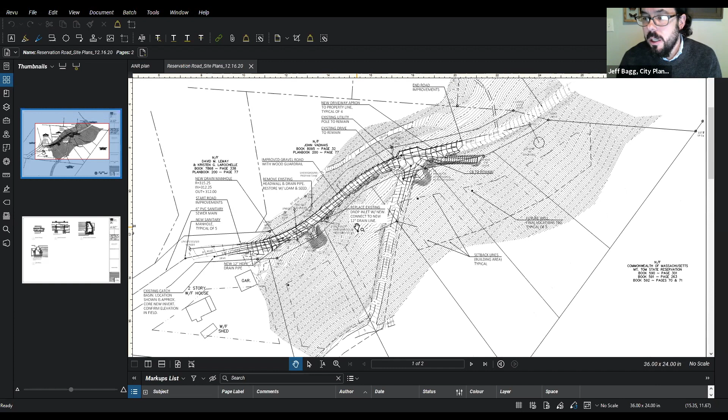I've had several discussions with Captain Constantine, and I think they requested one additional change in the HOA document, the Homeowners Association document, and my understanding from Attorney Lane is that change was made. To be honest, I was expecting either Captain Constantine to be on the call or to write a letter, and unfortunately we don't have either. But I'd provide in good faith that the fire department was accepting of this concept. It's taken a while to get to the HOA, so at some point having Attorney Lane just talk through that. In the meantime I'll email Captain Constantine and see if he can hop on, but I do know they were supportive of where the applicant has ended up. Jeff, even if you can email or text him to confirm he's okay with this subsequent change to the HOA document, I don't think we need to drag him into a Zoom call if we can just get some more verification of that.

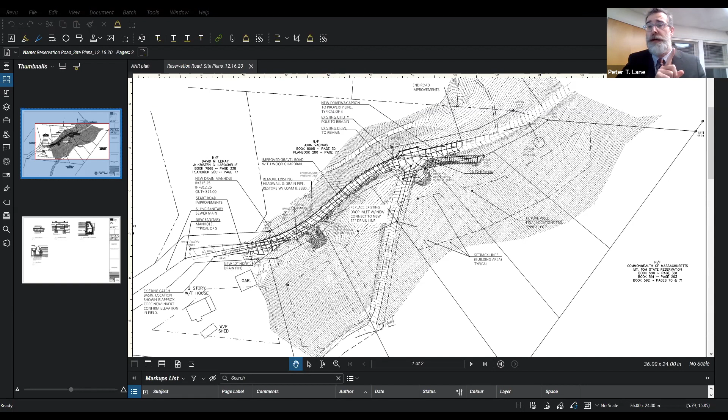Yeah, understood. Peter, does that sound like your understanding of where you left it with Captain Constantine as well? Everyone has the most recent HOA document that was forwarded very late this afternoon. Absolutely, that is exactly where we left it. He received my last draft Wednesday last week, emailed back that he had one minor change, which I put in and accepted. Then today I submitted further changes to the HOA that satisfy, I believe, what the Easthampton Fire Department is concerned with, and what the city engineer is concerned with as well, which I'll get to.

Okay, great. So before that, I cut you off - you were talking about getting water up to lot 5, I think, right? Yeah.

Give me one second, I'm going to do a quick change of hardware here because I'm going to want to put the HOA document up, and I don't know if you guys have all got it.

I have it. Chris has that too. I got it all. All right, great, thanks.

Two documents are submitted to address all of these concerns. One is the new site plans from Jeff Squire, made after the walkthrough with Captain Constantine. The other is an HOA document to spell out homeowners' responsibilities and acceptance of responsibility and liability for the road.

The fire department wanted to see a turnaround right there in the middle, which we now have designs for. DPW also wants other improvements to the road, including water drainage. Especially the fire department wanted to see that the road is left at a passable width of 16 feet at all times, meaning in winter, plowing will have to account for that, and snowbanks cannot encroach on that 16 feet of passable space.

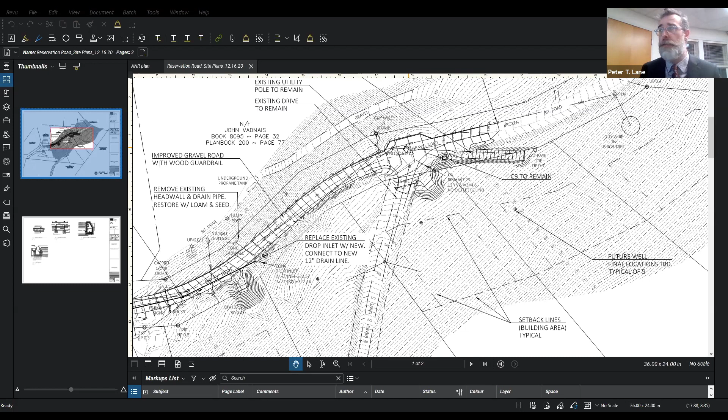They also wanted a requirement that all homes built on lots 2 through 5 are equipped with a 13D sprinkler system, which would just be a life safety measure to give the fire department a bit of a cushion, so that if there's an actual fire, the sprinkler system is hitting it before the fire department arrives. They wanted us to also explicitly point out that the 13D sprinkler system is only a mandatory life safety measure, and that homeowners still have to expect a delay in the arrival of emergency vehicles.

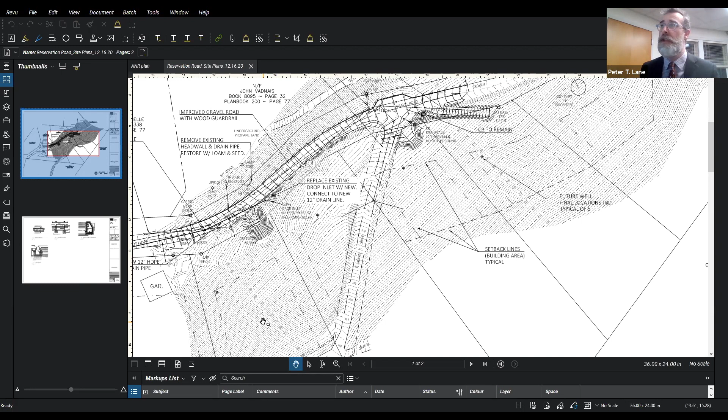We have done that. If Chris, yep, if you would be so kind as to put up the HOA document. Sure, can you see it now? Or do I have to reshare? Yeah, I think you got to reshare. Okay, give me 1 second, figure out how to do that. So I have stop share and then reshare. All right.

Okay, can you see it now? Yes, great. Yes, success.

So what we've done with the HOA document is, Article 2 restrictions is really the relevant piece for all of this. It's where we addressed all of the city's concerns. So as you can see in paragraph 1 of Article 2, maintenance of the roadway is completely the responsibility of the homeowners. And it's only the homeowners of lots 2, 3, 4, and 5, because as I've said, lot 1 is specifically excluded from this process right now.

The roadway maintenance requirements requested by the city will be handled by the homeowners, each paying a quarter of the costs of it all.

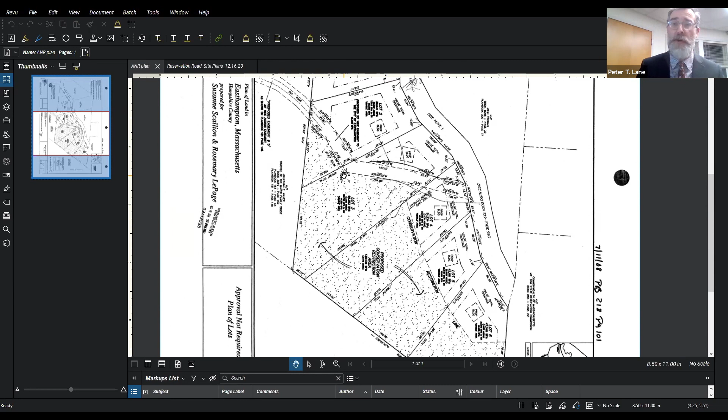The Homeowners Association document now makes clear that the conservation restriction remains, and homeowners cannot build on those areas -- again, those that are there on those site plans, the plans that were submitted with the ANR. But we make that clear additionally in paragraph 4 of Article 2 of the HOA document, that there is this conservation restriction.

If I am not missing anything, I think that covers the kind of history and the concerns that have been raised, and that we've used the homeowners association document to address.

Chris, would you mind -- oh no, we're all set. Conservation restriction, yep. So again, it was that section right there on the restrictions where we tried to address all of this with a single HOA document.

I'm not sure whose idea it was to use an HOA document in this way -- I think it might have been Jeff Bagg, and again I appreciated that input as well. It's really flexible; I found it to end up just being a totally flexible thing. I would draft it, send it to Jeff Bagg, he'd tell me what the concerns were, and I would go back to the drawing board with it.

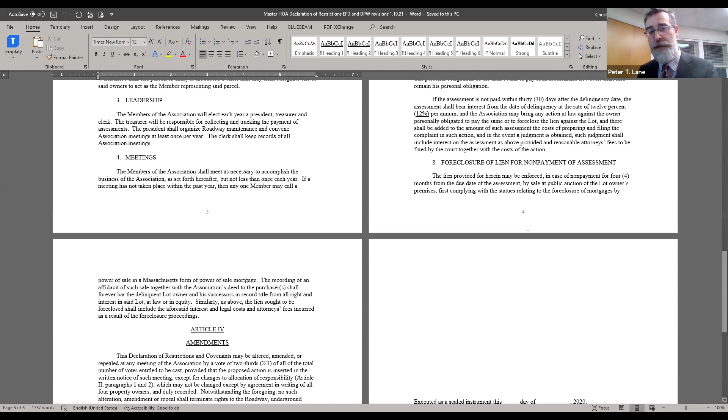With that too, I'd also like to say I'm happy to answer any questions. I'm sure Jeff Squire would as well. Also, I know this is a lot to digest, and we're all kind of doing this without a roadmap. Happy to present this tonight and come back next time for further questions if anybody felt like they wanted more time to digest this. I'm really kind of open, but I think that's the information I needed to present. From here, happy to just field any questions that anybody has.

Yeah, thanks Peter, that's really helpful. So I will open this up to questions to the planning board, but my first question -- it's always a little funny to have to ask the applicant's attorney this -- but the way I envision this is sort of, we would take a vote to accept the proposed roadway onto the property and sort of the continued maintenance of the homeowners association agreement going forward. Does that make sense? That's how we would condition it, just so tomorrow you can't adopt a different HOA agreement?

I think that does make sense. And again, my understanding of what I need out of this for my clients is some determination from you all that this works, which then we would have to file, because my prospective buyers would never get approved title insurance unless they saw that the city was approving of our plans wherever they're recorded.

So right, well, and they can't get a building permit, right, until we give that approval anyways. Okay, all right, I just wanted to think through the process of what we're actually working towards here.

Any other planning board members have questions or comments about this? Chris? I have a question.

So in the plan view, it looks like there's going to be city sewer and city drain, stormwater collection in the street. Is that correct? Connecting to the city's system? So there is city sewer that we're connecting up with.

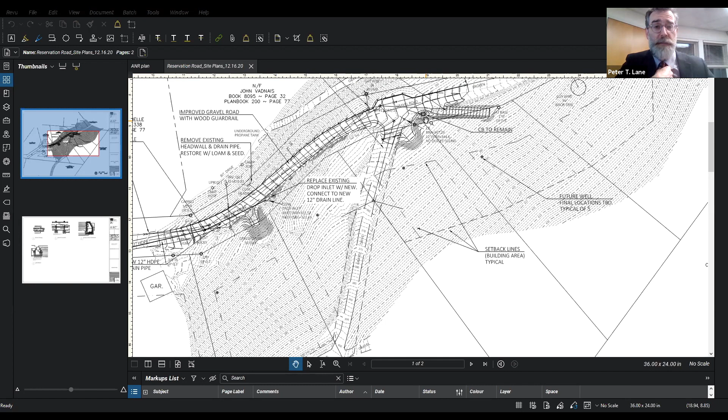Yeah, I could hazard the guess, which is that the assumption of DPW is that area we're talking about, that stretch, would fall under the responsibility of the homeowners. Yeah, and that's my understanding as well, which is why we drafted it the way we did and why I included the line of full responsibility for the road maintenance.

Gotcha. So the city picks up their responsibility somewhere down at this manhole, or maybe somewhere between these sewer manholes. Well, this is a new manhole here, so I guess this is where the city would, or the homeowners would, start. I guess we need to clarify exactly where their responsibility begins. Sure.

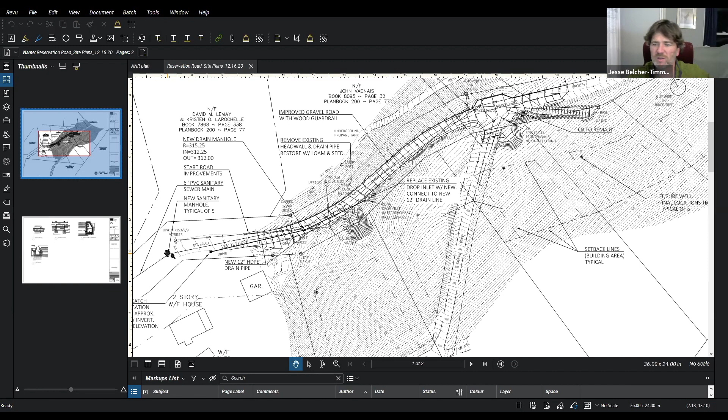Yeah, that might be a conversation to have with DPW. Does that sound right, Peter? It does sound correct, and I would like to have it and be clear on it. Yeah, especially the drain system, the stormwater system here. Looks like you're putting new drain manholes and pipes in here too. So exactly where the responsibility splits is my only question.

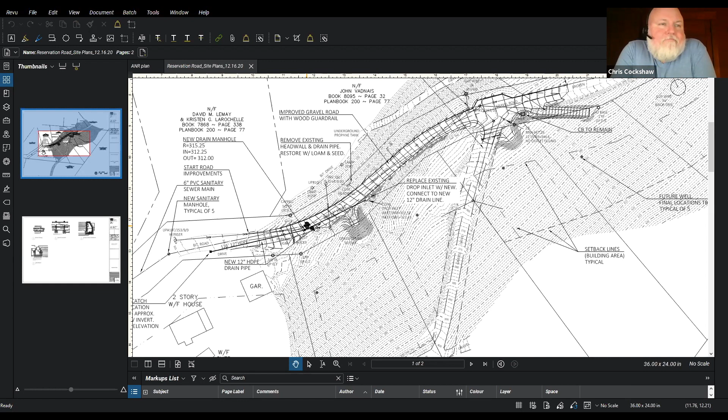Yeah, and it sounds, Peter, like your clients are assuming that they and then the subsequent homeowners will take on that responsibility. So it's probably not like a fight, just a matter of clarifying language so it's very clear to people ten years from now what's going on when there's a manhole. Yeah, I think that's a perfect characterization.

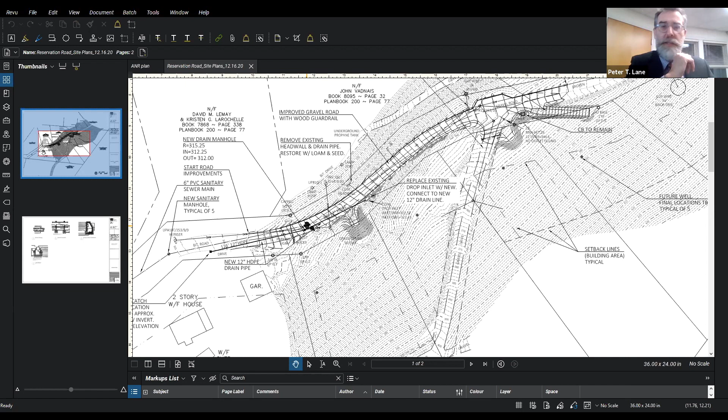My only concern when it was raised about making clear that there's homeowners' sole responsibility was how that would impact future homeowners' ability to get insurance or things like that. I'm very clear this is doable. It happens all the time in Western Massachusetts on private ways. It'd be a bigger problem in a rural area, but in a city like Easthampton, I don't think there's going to be any problem there. But yes, we should talk to the city engineer and get clarification on that.

Okay, great. Chris, any other questions? Nope. Harry, I think you had your hand. Yeah, who's putting in the guardrails and the telephone poles? It's also homeowners' responsibility. But guardrails, yes.

But what did you say? Telephone poles? Yeah. There are already existing poles along that road now. It's really just the guardrail that needs to be added.

Well, telephone poles aren't in the best of shape. I go up there all the time. I know that property very well. I was on the planning board back in 2008 when they approved this thing. Oh, okay. And that's being built right on the side of that mountain. To me, that grade is just unbelievable. I just can't imagine owning a house on the side of that hill like that, personally.

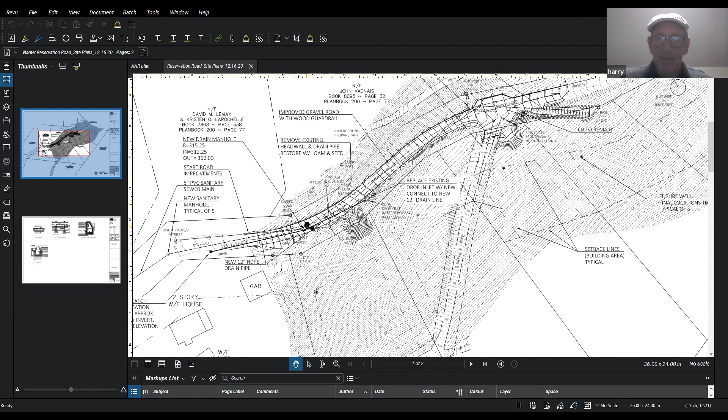No, you build them in. It poses some engineering issues, I'm sure, but looks like they figured out a way to make it work.

So are there new poles going in? I don't see them on here. There aren't any shown on this plan that are proposed. It will really be at the jurisdiction of the utility company to determine whether the poles that are there are adequate to run the new power or not. We're really not in a place to say.

But there are poles there now, some of which have been replaced recently. Right, they're showing existing utility pole to remain. And then it looks like another one here that's probably going to remain. Yeah, and then this one.

Okay, so maybe just getting the HOA document to also reflect responsibility for maintenance of the guardrails and any of the infrastructure that's going in would probably help clarify things.

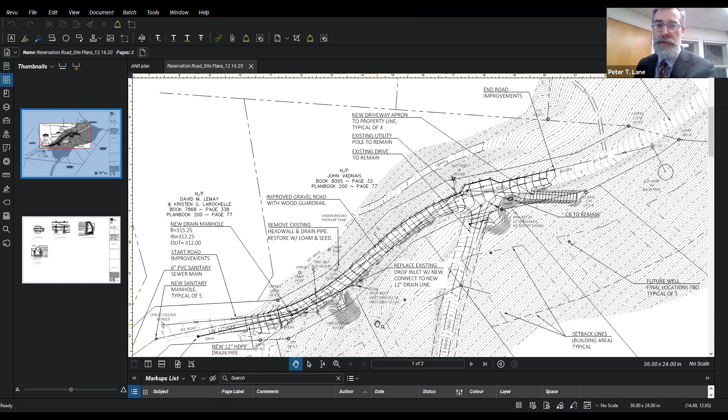Harry, any other questions? Before this is built, will this come before the planning board again, or is this it? I understand that this would be it. It's developable as of right, and the only requirement still before development was further city approval of these road improvements.

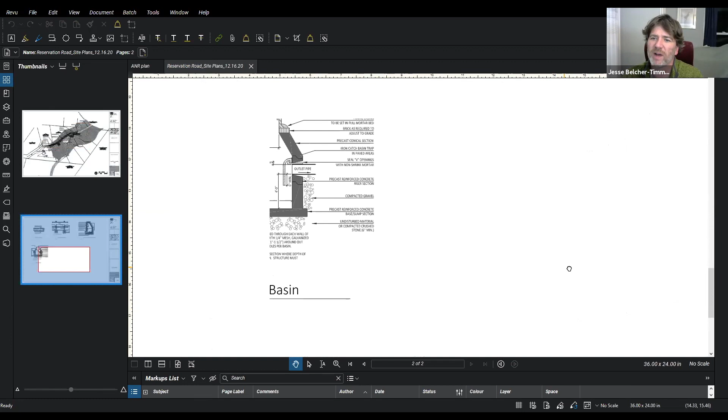Yeah, Harry, this is just an ANR, right? It's not a subdivision. So, well, I understand that, but yeah. So normally in an ANR we wouldn't even have a second look at it, but because you and your prior board put this requirement in here, we're evaluating the roadway before it goes in. But my understanding is that it wouldn't necessarily have to come back to us for these residential lots.

This is the proposed guardrail, Harry, that they're proposing to put back. Thanks, Chris. Is paving the road not an option in this? That's a great question.

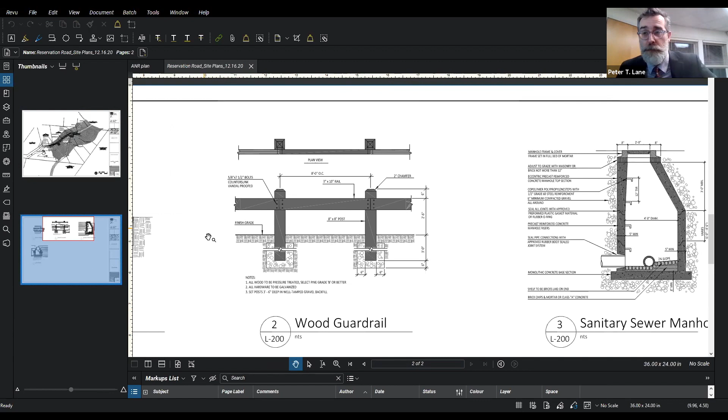It is cost prohibitive, I think, is the real issue. What would the grade make harder to do? So, sorry, what's the angle, the grade of the road? It's somewhere between 10 and 12%, depending on where you measure.

I can't imagine the erosion on that road. They're making that out of gravel. It's going to be unbelievable.

Well, I guess to the extent there are maintenance issues, Harry, that will be the obligation of the homeowners association. You may very well be right, in a few years they may regret that, but that will at least not be a city problem. And it sounds like the DPW, or the city engineer, has also reviewed the stormwater issues related to it, so hopefully that won't be a problem.

It's the people who live on the other side of this thing, the private property, who are going to receive all the gravel that's washed out into their property. That's the problem.

I guess at the end of the day, approval not required means approval not required. Well, we're a little more nuanced than that in this step, because we do have to approve the roadway. But yeah, I do think some of these things are outside of our area, especially since the stormwater part is being reviewed by the city engineer. And the paved roadway too — he stated a paved roadway would have been preferred but was not included as part of the proposed plan. He's not saying it's required, he's just making a statement.

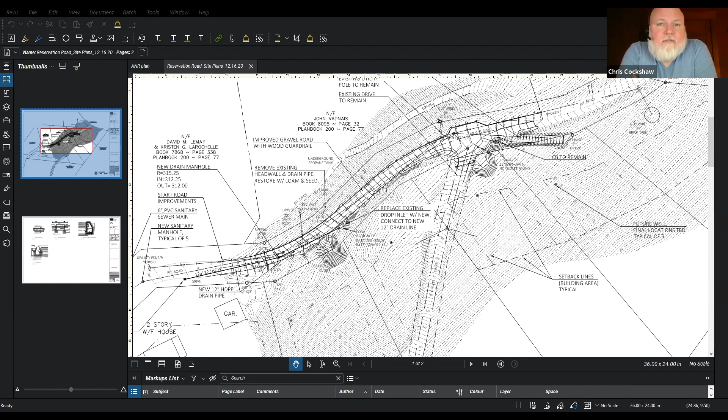Right, I have Jeff's assurance, and that's meaningful to me. And this is a little different than a normal ANR.

I wonder if the applicant and you, Jesse, and maybe the rest of the board would be amenable to keeping this on the agenda for one more meeting in the hope that we can get the fire department on just to comment. I trust everything everyone's saying, but I would love to hear from him directly and maybe ask some questions.

Yeah, Jim, I think that's a great idea. I also know you dropped off and came back on, so you might have missed that we're hoping to get a little more clarity in the HOA document about responsibility for maintenance of the utilities and other infrastructure improvements. So it probably makes sense to have it come back either way, just to hear from the fire department and see that revised language. Thank you, Jesse. I think that makes great sense.

Any other questions from the planning board? Planning department, any other comments or questions?

No, I think this is good. I appreciate Attorney Lane and Mr. Squire taking the time, and it's been a while to get to this point. Knowing that these may be the final kind of questions from the board is helpful.

I do agree, I think getting the fire department either in a letter or to attend is meaningful. I did communicate with Dan, but I don't think he's able to hop on this meeting. The only other thing we'd do in the interim, if we continue to the next meeting, is take another look at how the vote would be structured to connect all the dots together.

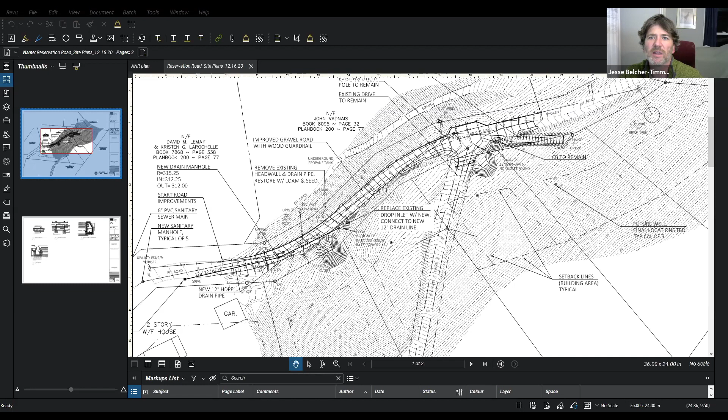I don't see anything. So with that said, Jim, I think your suggestion of continuing this to the next meeting makes a lot of sense, just to dot our I's and cross our T's. Totally agreeable with that. You good? Okay, thank you, Peter.

So that would be February 2nd. Great, okay, February 2nd, motion. Would that work for you, Peter? I'm almost certain it will, and yes, it will. Great.

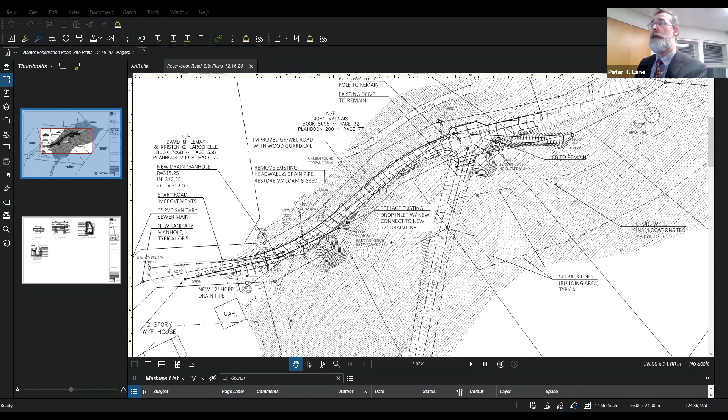I motion to continue the ANR for Scallion Lepage Reservation Road till February 2nd. Second. All right, to continue to February 2nd: Harry, aye. Austin, aye. Chris, aye. Jim, aye. And I am an aye. Peter and I lost Jeff here. Jeff Squire, there you go.

Thanks, guys, very much for this. This was really helpful. It's not a typical situation, so hopefully we can get this thing over the finish line next meeting. Thanks so much, appreciate the time. Thank you, thank you everyone.

All right, next up on the agenda is CrossFit Stronger Than Yesterday LLC, but I understand there's a request to withdraw this application. Is there someone here from the applicant tonight? No, the applicant stated she wouldn't be able to make it, and I'll read her email. Great, for the record.

This is from Rachel Diamond, identified in the application for 168 Northampton Street as the applicant, applying on behalf of CrossFit Stronger Than Yesterday LLC to operate a personal service establishment, a fitness center at that location. She writes, on Friday, January 15th at 4 p.m.: 'Hello Curtis, I'm writing to let you know that we would like to be removed from the hearing on January 19th. Aubuchon Hardware is expanding with the closure of Manchester Hardware, and they bought us out of our lease, so we will be moving out of the 168 Northampton Street location at the beginning of February. I wanted to thank you for all your help and for pointing me in the right direction to get our application underway.' I further spoke to the applicant to ensure they weren't going to be relocating somewhere else in Easthampton where they might be able to continue this and amend the application to the new location, but as they do not have clear plans at present, they're just looking to be removed.

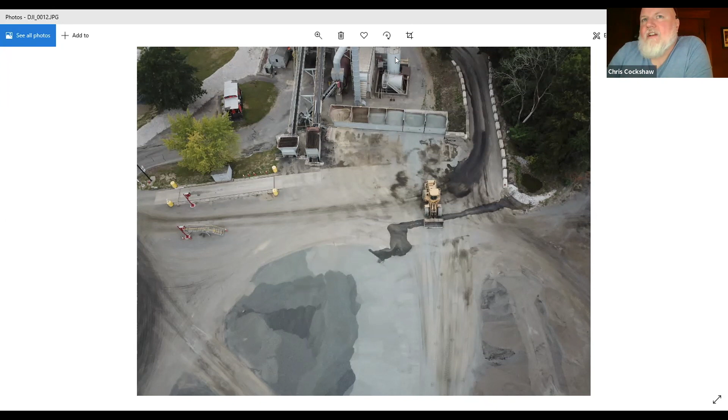Okay, and then there's another—just a quick, if I could just look at one more drawing. I have one question, oh never mind. Sure, go ahead. With regard to that same location, Mr. Capel, was that one of the locations that you toured with the conservation agent? Yes, it is. We walked this entire area.

Okay, you did. I don't know if that comes through in the report, if that was one of the images embedded in the conservation agent's report, but I wanted to ask if that area was flagged previously. I think these photos have been submitted to various people over time. Cassie and her team walked that area with us. In particular, the photos submitted recently were submitted in October and were being dealt with that way as well, just for that information. Okay, thanks, that's fair.

So I think the only other one—let me just verify—is number 0028. I just have a quick question on that one. Rather than share twice, I'm going to pull it up now and then screen share it once it's open, and then you can tell me that that's right or not.

That's the one. So this also shows what looks like a construction area, or maybe it's just your site where you're picking up material, bringing it over to your plant. And I see there's a pretty substantial rainwater detention area as well, stormwater detention. Is that still an active stormwater detention area?

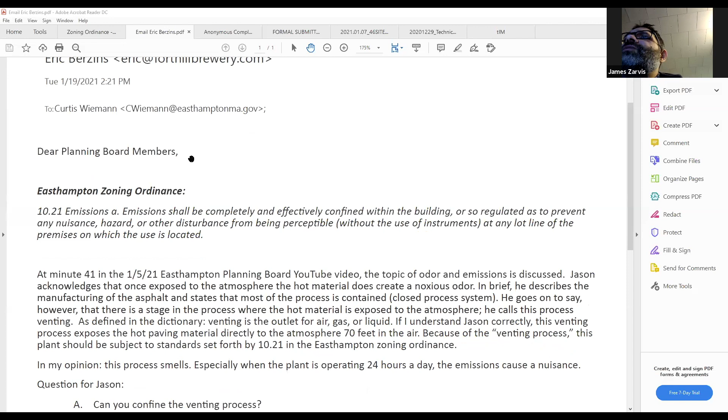I think there was an email from Eric Berzins, received it looks like at 2:21 on January 19th—that was today, I think. It says, 'Dear Planning Board members,' and then it lists the Easthampton zoning ordinance 10.21 for emissions, saying emissions shall be completely and effectively confined within the building, or so regulated as to prevent any nuisance, hazard, or other disturbance from being perceptible without the use of instruments at any lot line of the premises on which the use is located.

And then it goes on to say, at minute 41 of the 1/5/21 Easthampton Planning Board YouTube video, the topic of odor and emissions is discussed. It says Jason acknowledges that once exposed to the atmosphere, the hot material does create a noxious odor. In brief, he describes the manufacturing of the asphalt and states that most of the process is a contained, closed process system. He goes on to say, however, that there is a stage in the process where the hot material is exposed to the atmosphere—he calls this process venting. As defined in the dictionary, venting is the outlet for gas, air, or liquid.

If I understand Jason correctly, this venting process exposes the hot paving material directly to the atmosphere 70 feet in the air. Because of the venting process, this plant should be subject to standards set forth by 10.21 in the Easthampton zoning ordinance. In my opinion, this process smells, especially when the plant is operating 24 hours a day. The emissions cause a nuisance.

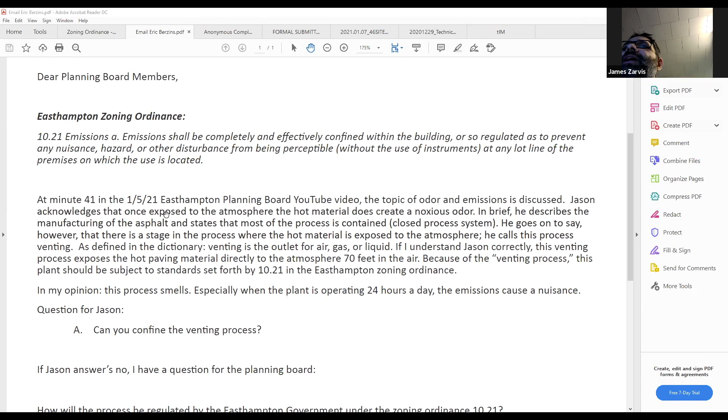Question for Jason, he asks, listed as A: can you confine the venting process? I'm going to continue to read what he has here. He says, if Jason's answer is no, I have a question for the planning board: how will the process be regulated by the Easthampton government under the zoning ordinance 10.21, if the venting process cannot be confined? An understanding of the process is needed.

I'm not sure if he means understanding or undersetting, but he says understanding of the process is needed in order to implement local regulation. Some examples of what questions need to be asked: what is the composition of the material? How hot is the material? How long is the venting process? What is the composition of the material being vented into the atmosphere? What technological process can be implemented to minimize smells? And rather than venting at 70 feet, can you vent at ground level with a hose? I respectfully ask that the planning board address venting during the drafting of the special permit. Cheers, Eric Berzins, 30 Fort Hill Road.

I'd like to ask the applicant if they have seen this letter before, and if they have any commentary or would like some time to make a response.

No, we have not seen this before. Can you scroll up on the email for a second?

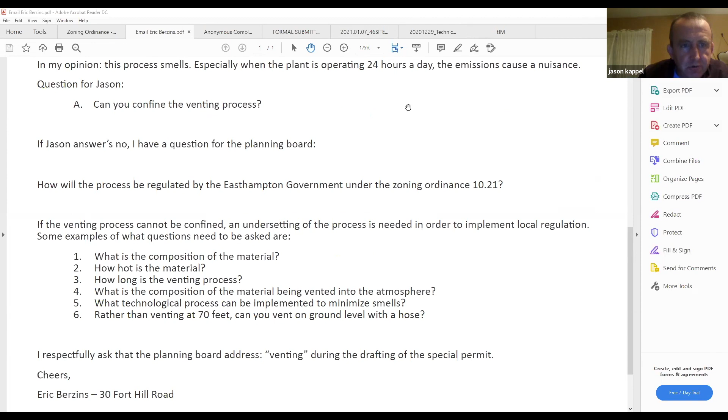That's your code 10.21. Emissions shall be completely and effectively confined within the building, or so regulated as to prevent any nuisance, hazard, or other disturbance from being perceptible.

So the state of Massachusetts regulates hot mix asphalt plants, and there's a source registration, which we have for this site, which was properly permitted, and it addresses emissions from hot mix asphalt plants. So I don't think that the township is trying to extend, by your zoning, the administration and permitting of state-applicable permits on this facility or anything like that. So I would say that we are appropriately permitted. We operate within the tenets of our permit. We report to the state of Massachusetts every year as we're supposed to.

The constituents of hot mix are well known. They're in our permit. And I would say that we listened to neighbors who spoke at the last meeting, when specifically asked either by Curtis or Jeff whether they smelled anything, and the gentleman—I can't remember his name—said he'd been there for quite some time and did not experience nuisance conditions.

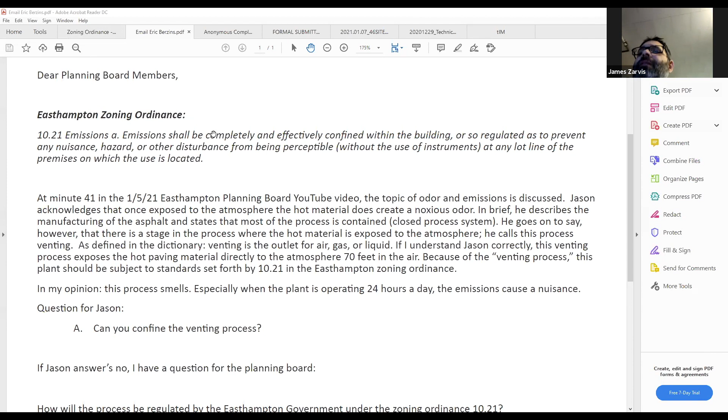I do have to say that this letter we received is, however, a member of the public saying that they believe it's a nuisance. That's something the planning board listens to—it's why we asked for public input. And that's something within our jurisdiction to be concerned about, odor in this case. I do think it's telling that some people aren't smelling it, while someone says they are.

In the overall meeting, I got the sense from you, and from discussion, that this is something that happens periodically—you open it up, and as the material is falling into the trucks, there's a period where it emits odor, but other than that it's completely contained, and you have to follow a requirement. I forget the agency that regulates your emissions—can you remind me the name? The state of Massachusetts Environmental Department—there's a Division of Air.

Okay, so my take on this is that seems like a fairly slight time in which it's happening, and you are in an industrial zone. For me, it's something I want to pay attention to, but I find it to be relatively minor. Does the board have any opinions on this?

I would just like to add, while the board is contemplating, that we're a seasonal business. We shut down depending on the year, end of November, certainly by the beginning of December, and then we're shuttered until mid-April, when the state of Massachusetts allows us to pave. So there's a good 4.5 months where we're non-operational.

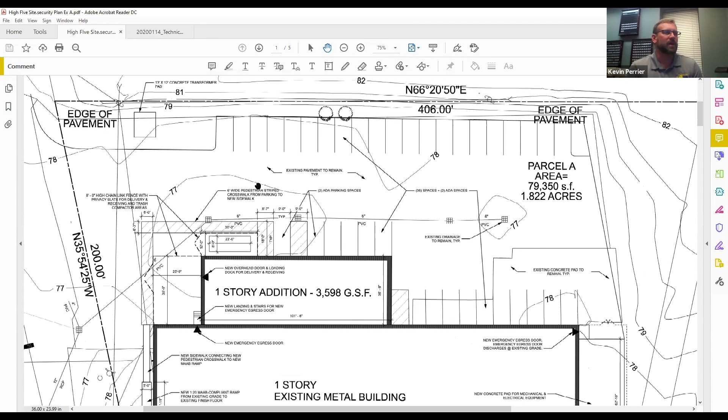Yeah, so you'll see in that plan view, the top left corner, it says 8-foot high chain link fence. That will be our primary receiving area. Essentially, this isn't large vehicles coming in and out, like tractor trailers. You're moving minimal poundage, so chances are it's going to be loading into something like a Sprinter van. They'll go into the chain link area—that area is secure, acts as somewhat of a sally port, and the product is loaded from there. Then it heads out through GPS tracked vehicles.

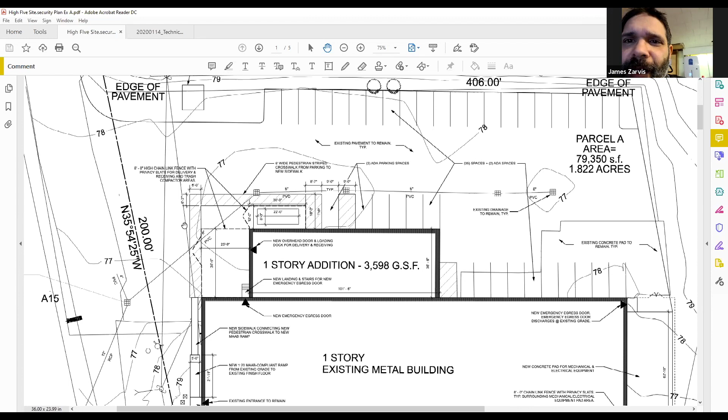I'm trying to find that sally port—my eyes aren't that good, and it's a little small on my phone. Curtis, are you able to move your mouse around that, so we can see where that sally port is that he's referring to, where the truck will dock and undock? My understanding, correct me if I'm wrong Kevin, is that's going to be this pad here, and the truck pulls into this 12-foot wide area here. Is that accurate? No, that's actually the dumpster—it's an enclosed dumpster.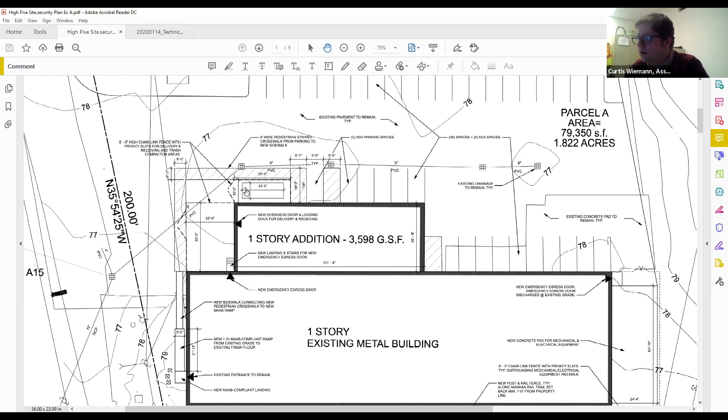So actually where you see the one-story addition, just to the left, it's called out as... this here? Yes, yep, right there. Okay, so that's an 8-foot high chain link fence. Yep, that gets secured. So is there a gate for the fence? It opens, yep. Then the truck comes in, and I see there's kind of a little stairway down there, so it doesn't really dock—it just sort of stops early, and then you walk stuff down into it?

Correct, you're not going into a large truck. We do have a loading dock there, but it wouldn't go through that. This isn't coming out in a giant box truck or something. You're talking about moving product at one time that may fit in 3 or 4 small boxes.

It's high value product, but not large. Okay, that's good to know. About how many times a day do you think these deliveries are leaving? This would be maybe twice a week.

Twice a week. Okay, what security is going along in this building and with your product? Well, the security plan was reviewed by the chief, and his letter of approval was attached. Essentially, every inch of this facility, literally, other than the restrooms, is covered by cameras. The police department has access to those.

We've offered interior access. They've only requested exterior access to the cameras, so they'll be able to pull those up 24/7. We store that footage for 90 days. All doors, interior and exterior, have card access, and there is 24-hour site lighting on there.

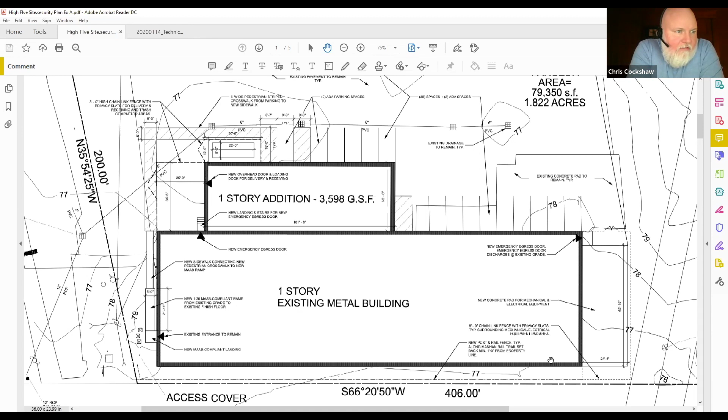Chris, I just have a quick question. On the abutting rail trail, you show a post and rail fence. So you're still going to be able to see through that fence. It's not like it's going to be a stockade fence or something that someone could get behind and have no one see them from the rail trail, and then potentially cause a security threat, right?

It's just a post and rail, similar to what's already out there. Is that correct? That's correct, yeah, that was a request. I can't remember who it was, but in one of our early on meetings it came up. I can't recall if it was conservation or something that Curtis had suggested, but that was a request by the town, so we added that post and rail.

It'll be matched with the other ones on the bike path. But there are no windows or anything on that side. To answer your question, there's nowhere that anybody could hide or anything like that. The only fences that you will not be able to see through are also done by request, which are the ones that are going to hide the mechanical equipment, the condenser pad. If you're looking at this in plan view, plan right, that condenser pad will be hidden on two sides by a privacy fence.

Okay, that's the only security question I had. Thank you. All right, when we did the last special permit on this particular building, as Chris just alluded to, we noted that that fence was just a, I don't know what you want to call that, post and beam. But it seemed that that bike path was very close to the rear of the building. Can you remind us what windows, what access there is from the rear of that building?

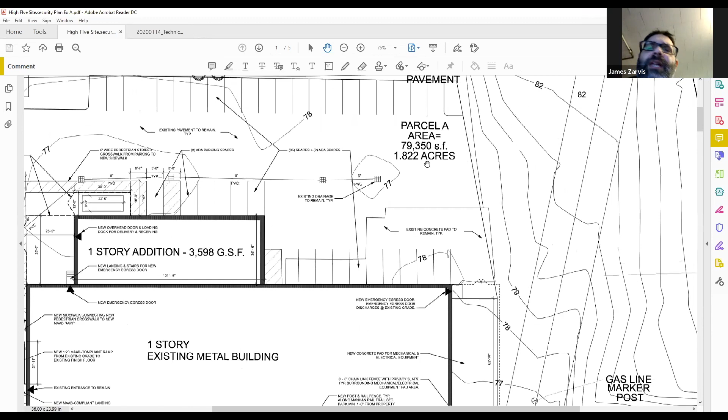Yep, okay, all right. So let me ask now about that parking we talked about just a few moments ago. I think you said 37 spaces, 3 visitor, 2 handicap. Jeff, because I'm on my phone here, it's messing with some of the notes I had access to on my laptop, which is on the fritz. Can you tell me, or Curtis, I'm sorry, I'm so used to saying Jeff, can you tell me what our standard is, required number of spaces?

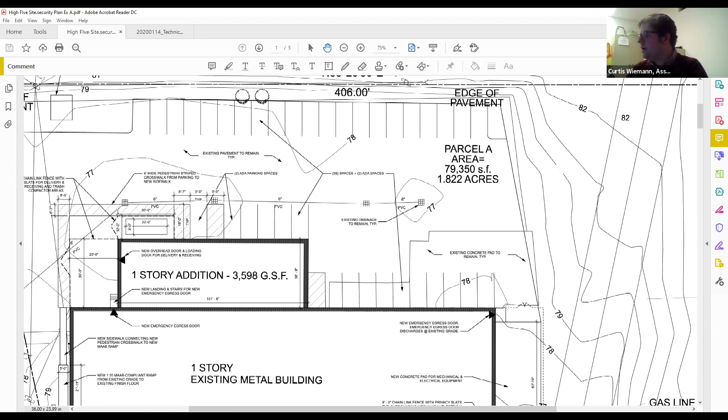Sure. So the mandatory number of spaces is established in the zoning ordinance, and it normally is 1 space per 150 square feet of floor area per 10.1. But the board also has the ability to waive that explicit requirement if they believe that parking on site is sufficient.

What would that requirement be in terms of number at that level? I did the math at one point, I think it was somewhere around 135 roughly, 135 spaces based on the amount of space. Very excessive. So this is a waiver for the number of parking spaces.

Okay, that's something we need to consider and we need to discuss. And I'll just state right off that the fact that there is no retail component here, you'll have 37 spots for at a max at one time 20 employees plus the possibility of a twice a week delivery. That seems to be in line, but we have to think overall of safety, future use, etc.

Does the board have any comment on the requested waiver for the smaller number of parking spaces? Anyone here have an opinion? Okay, all right, I'm guessing then that just from that little straw poll that that's going to be all right.

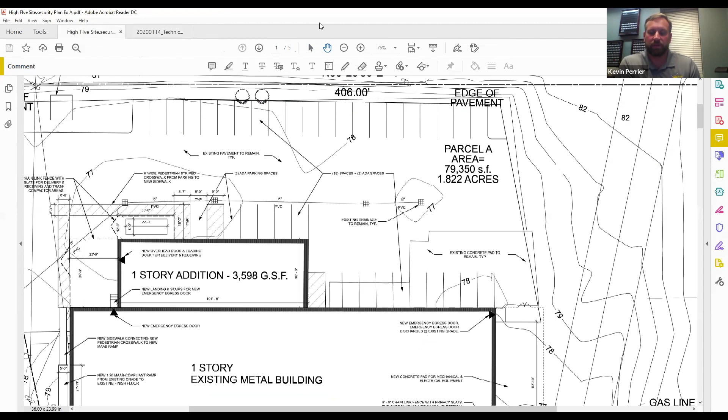Odor - you talked a little bit about your carbon filtration system, can you just tell us about it, recap it? Sure. So the growing process now, excuse my ignorance somewhat, I've gotten a crash course in the last 6-8 months here on cannabis cultivation, but I'm still not an expert on the plant side. But as far as the odor control, the actual plants essentially live in a closed environment. So we have around a 10,000 square foot canopy of growing. That space does not receive any exterior air.

So the odor really comes from your processing of it, where you're taking the plant and turning it into oils. That process will happen on a very limited basis, maybe 2 or 3 days a week. We will be using a carbon filtration system, which takes out the majority of odors, but we also plan to vent that through the roof structure as opposed to through the sidewall.

It's really impossible to say there will be zero odor. However, from other cultivation facilities, we will be producing far less in a much less impacted zone. Areas behind Eastworks are much more sensitive due to breweries and traffic. We're fairly isolated other than the bike path, and we'll make every effort to vent it where the odors, as long as the wind's cooperating, will not go near the bike path.

What kind of carbon filtration system are you using that you're venting off the top? The exact model numbers have not been specified. Essentially, you have overhead vents for the extraction process that run through carbon filters. Similarly, when we do work in hospitals, we run them through a 2-inch carbon filter before the air goes outside, which takes care of the majority of odors. So as far as a specific pleated filter number, I don't have that at this time. We're not at that design phase, but it will go through at least a 2-inch carbon filter.

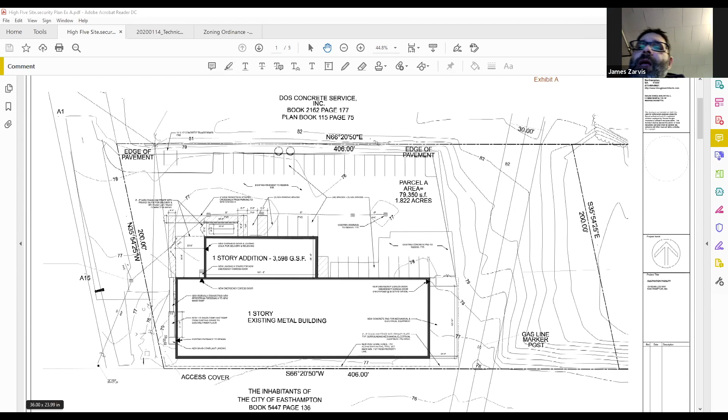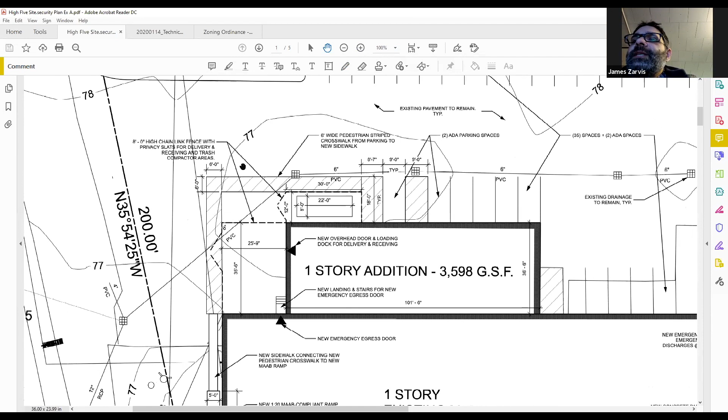Okay, we don't have a light plan. No, and I don't see the poles. I don't know where the new poles are on this site plan. Can you help us with that? Sure. I'm not seeing it either. Yeah, I'm just trying to grab my other plan so I can move it around. Okay.

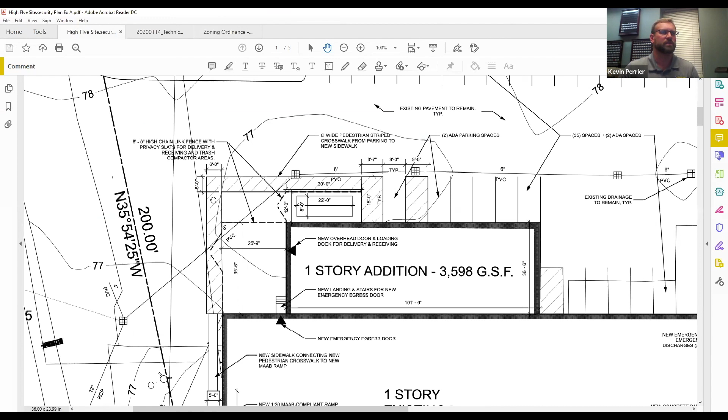Yeah, I apologize, it looks like you didn't label them. They are going to go — there are 2 bushes up on the property line. You'll see where it says DOS Concrete Service, then there's a contour line labeled 82. There's supposed to be one between those and one on the corner where it says edge of pavement on the far right-hand corner.

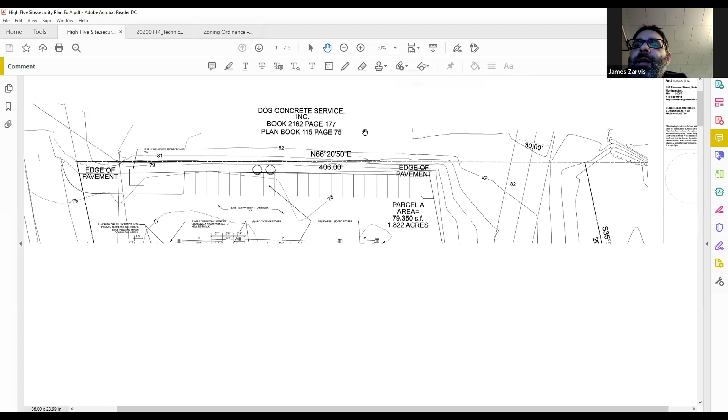Okay, I definitely think that's something we'd want to see. So that's a modification we'll be looking for. Yeah, a light plan will be important too, to see the lumens. Yeah.

So my memory of this from before was that it was largely paved inside. Is that correct, all bituminous surface in there? It's not the greatest condition, but the plan is it will be left for now until budget allows. They may top it, but it is all paved as is.

Right, I do recall the paving was in really rough shape. In the previous application they were proposing to pave it. So if you're not proposing to pave it this time, are you planning to restripe it for all these spots, or are these spots accurate? No, we will restripe it over the existing pavement. Okay, so you're not planning to make any enhancements to the paving situation.

If it's already paved and pre-existing, I'm guessing runoff isn't our biggest concern here. Chris, what do you think? Well, I should ask, are you increasing your impervious area with the new trash area and the new loading and unloading area? No, we're actually shrinking it. The overall impervious area is remaining the same, but the paved area will shrink because where the one-story addition is, that 4,000 square feet is currently paved as well. We are not increasing impervious area whatsoever in terms of paving. Yeah, the one-story addition is still impervious unless it's soaking up water, which you probably don't want to happen.

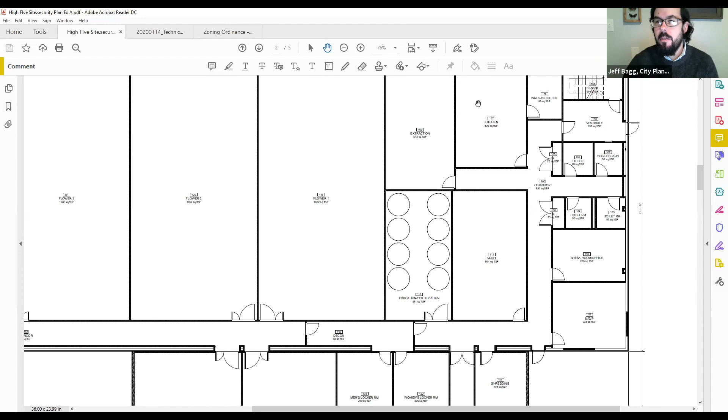Is that something that requires approval from the health inspector, Jeff? That's before that process, correct? Yeah, I would say, or Curtis, slightly before that part, because they would acquire the special permit, just knowing that kind of kitchen facility might get inspected by the health department. It will also get inspected by the fire department, and I presume the Cannabis Control Commission too. That may actually be a Jeff salient question because he knows how the Easthampton permitting process works better than I do. I think Jeff's summary is accurate. I think the only circumstance in which the Board of Health permit would go first is where it's a primary use, where the Board of Health permit is like a make or break. So if it would be a restaurant writ large, you may start dialogue with the Board of Health ahead of time. As Kevin said, the Board of Health was part of the pre-permitting meeting for this particular property in the first place, so my understanding from dialogue with parties there is that they're going to be going forward to dialogue with the Board of Health after us.

Okay, you see this diagram right here, this is exactly where I'm kind of wishing I could see how the venting and odor mitigation system was laid into it. I'm going to have to balance whether or not that's something I feel is required.

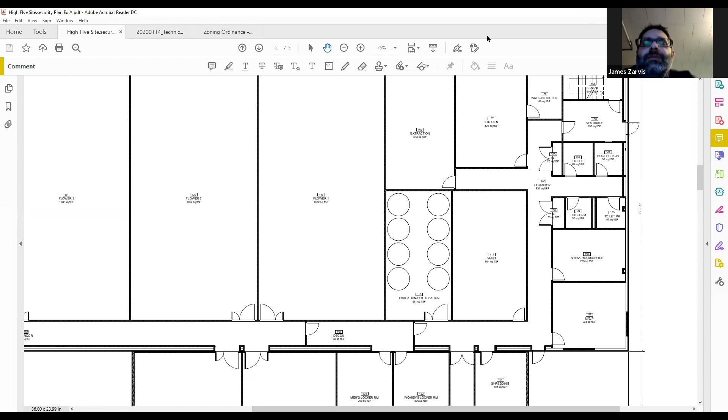We did speak with the Board of Health. Her stance on this, because we reviewed this, we had somewhat of a lengthy conversation about odor mitigation. At the end of the day, her stance was: look, you need to ensure that there's no odor there. And if you do not, we're going to cite you, stop you, and you're going to revise your system until the issue is resolved.

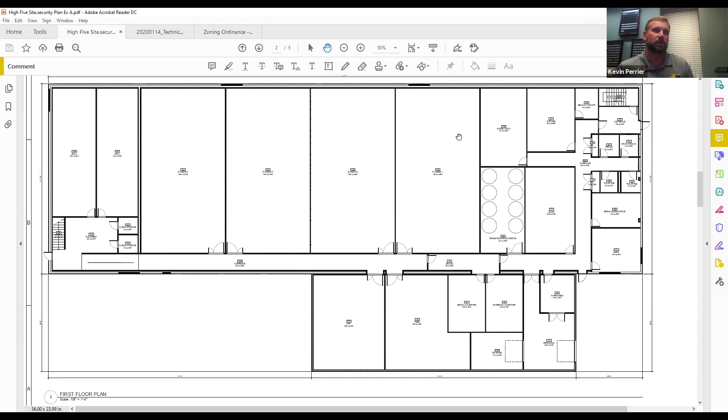And that's how the caveat came up. She said, have you had an issue with the existing one? She said no, we have yet to have an odor complaint about any cultivation or dispensary in town. So that gives us a pretty good baseline, because I feel we'll be far less intrusive than some of the existing ones, both in terms of location and the amount we're processing. Your highway business in this location, in terms of zoning, I believe they're actually industrial. That's even better than I thought.

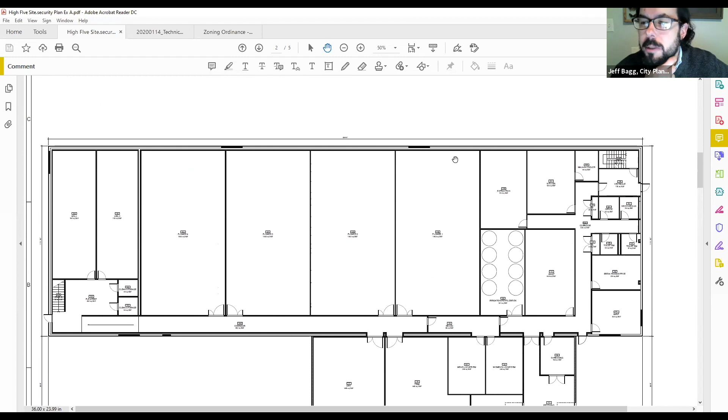One question for Mr. Zarvis and the applicant - we had one other project with an element of cultivation, and I think they may have had a similar response, that they didn't have everything worked out. One of the things was the direction in which the ventilation would exhaust out of the building, and in that case it discharged towards a more sensitive abutting property. Have you had any discussion with anyone who could tell you if the ventilation could be oriented to exhaust towards the parking lot and away from the rail trail?

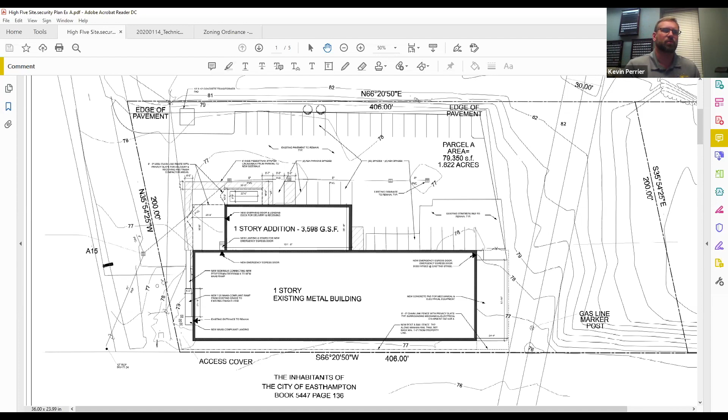In my head, I'm finding it difficult to measure whether putting it on the roof is better or worse. If the wind's prevailing in one direction, it comes over toward Route 10 and the dance studio or whatever's over there. In the other direction, it could go over the bike path. And it's one of these things where I know these systems work hard to mitigate all odors, but they don't catch everything - they are imperfect.

And you mentioned it's more than just the growing too - there's a component of emissions that occurs when you're making the product, whatever occurs in the kitchen. It's only in the making, so maybe I wasn't clear - the grow rooms are enclosed, they're self-contained, there's no venting from the grow room. So when you smell that, it's through the processing of the product.

Can you tell us a little bit about how you're processing the product? At the current time, and this is still subject to change, but it would be through a CO2 extraction. That's the most likely candidate for extraction. We spoke to the fire department about different options - as long as we're code compliant, we plan on determining all the details down the road, but I'd say there's a 90% chance it's a CO2 extraction system.

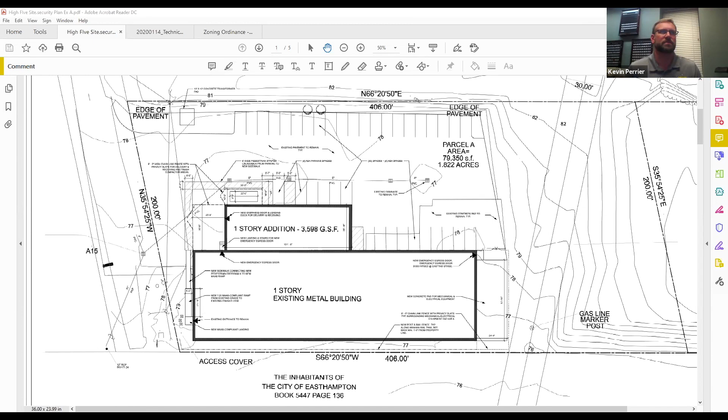Okay, I've gone through my list of questions. At this point, I think what I really want to see is where those lights are going to be. I'm hoping you can give us a plan, come back next time with a plan showing where the poles are going to be on the map. You don't have any tree removal or bushes or changes in that expectation other than the fence, is that correct? That's correct, there's very minimal site work here. Okay, no plantings, no new plantings.

No. Go ahead Chris, if you had more. Well, the only thing I'd like to see is - there is an addition, and my concern is, I'm not sure, it may not be a big deal, but when you look at the stormwater system, you've got some catch basins with what looks like 6-inch, maybe 8-inch - 6-inch PVC piping between the catch basins. A 6-inch PVC piping is not a lot.

I would think maybe we can get the city engineer's opinion on whether any stormwater management is required because of this addition, and if there's a determination of stormwater after the addition versus current stormwater, to make sure it stays on site as much as possible. Although, now that I'm looking at it, the catch basins all go off site anyway, so stormwater is currently leaving the site. So I guess, I don't know, Jeff or Curtis, if they're proposing an addition, does that require them to manage stormwater on site that offsets the addition?

My interpretation of the stormwater ordinance, and I defer to Jeff on this, is that it's the change in impervious cover that triggers review of stormwater on site. I agree with Kevin's interpretation that this represents either a net loss of impervious surface, or at least no change. I can say that what's there now constitutes impervious surface on which a new impervious surface, a structure, is going. And even though the pavement is in rough shape, it's still by definition impervious. So this would be a new impervious structure over an impervious one, meaning it probably isn't an issue. I might want a quick check from the city engineer, but I tend to agree it's probably not a big deal.